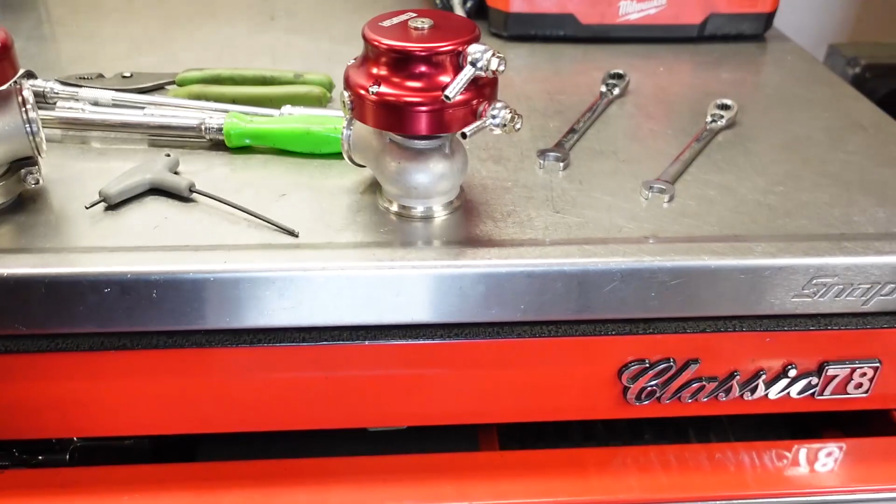Okay, so I've been thinking about my problem for the last week or so, and I came to the conclusion of what I'm gonna do, and I'm about to show you that. Okay, as you saw, I had those two boxes with these little twin wastegates here. They're just eBay 38mm wastegates, nothing crazy, weren't super expensive, but I'm hoping that by adding one on each bank, I can dump a ton of back pressure.

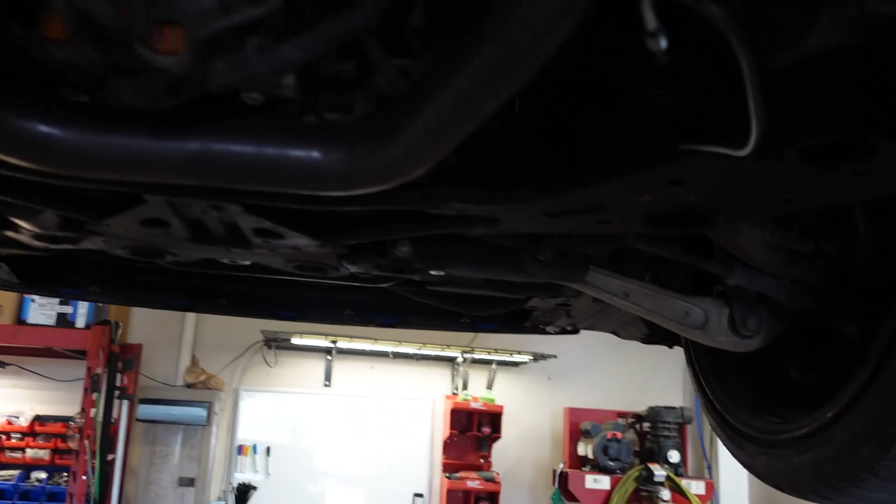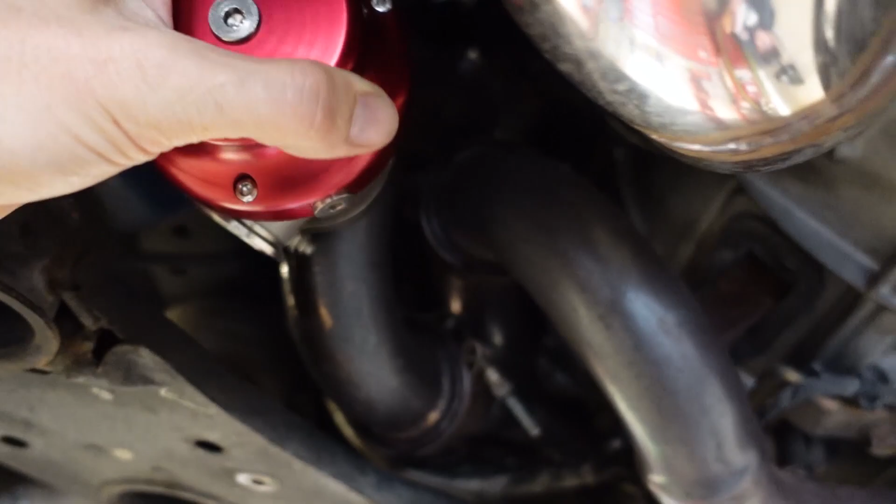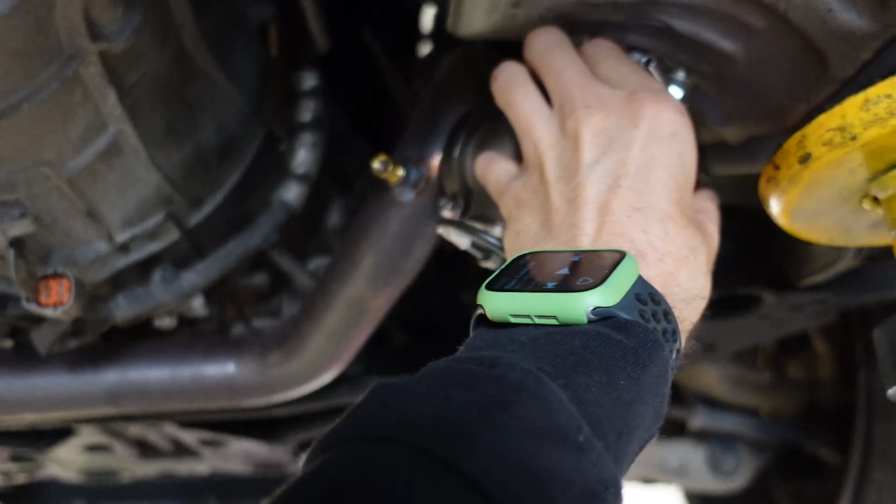So it'll kind of look something like this. I'll have to weld this on, but I have the one pipe coming on this side, and then I have this pipe coming out on this side, and these are the ones that are directly from the header. So that's the header flange down. I'll just shoot it down out of the car like that. And then same on this side. Just kind of put it there, shooting straight down. I have just enough room to get both of these in there.

And then, I'll basically be dumping back pressure off the header directly and back pressure off that header directly. So we should not have overpressure issues. So I'm gonna go ahead and cut some holes in this with a hole saw and then start welding them on.

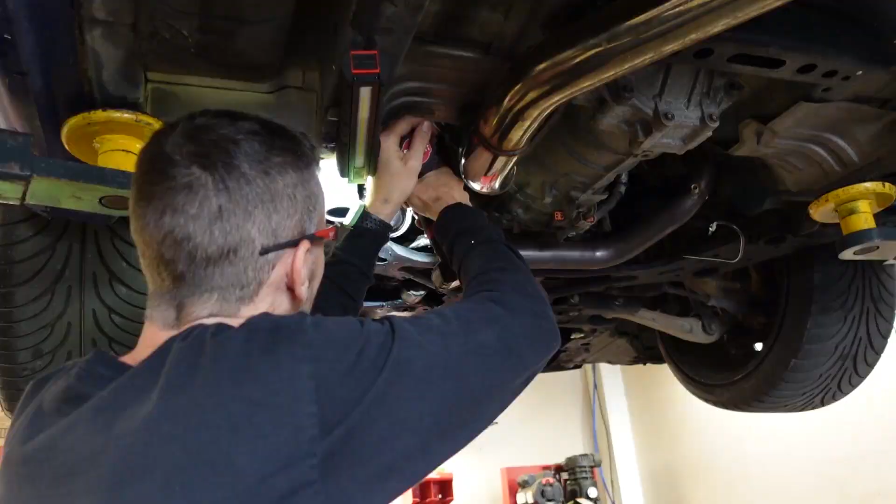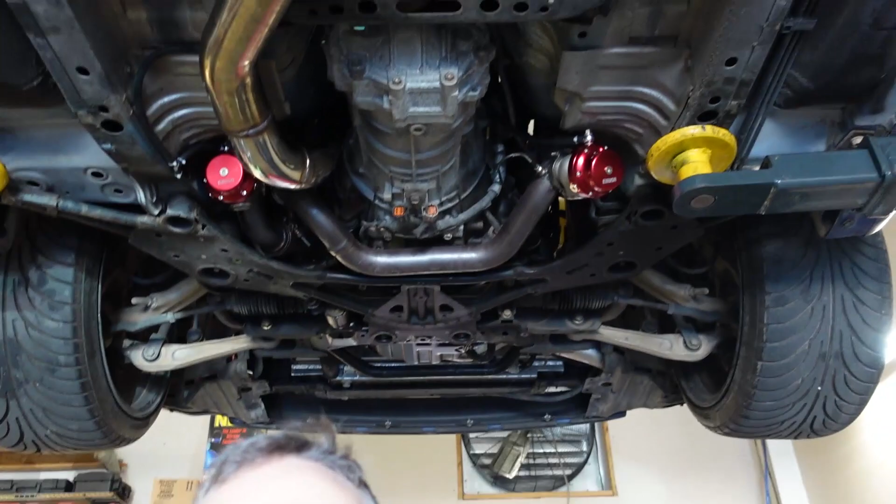Okay, so I finished the welding and I have the wastegates up here. You guys can kind of see it above me. I hope this works. I put the back pressure sensor back in, and I ran all my vacuum lines. Tried to tuck it behind the shield and stuff so that those don't get burned up.

Still got the 3-inch downpipe that I added, which should be nice. So hopefully now we're on a big enough turbo, big enough downpipe, and enough wastegate to get rid of this back pressure. So next thing we need to do is basically just put this thing back on the dyno and see how it does.

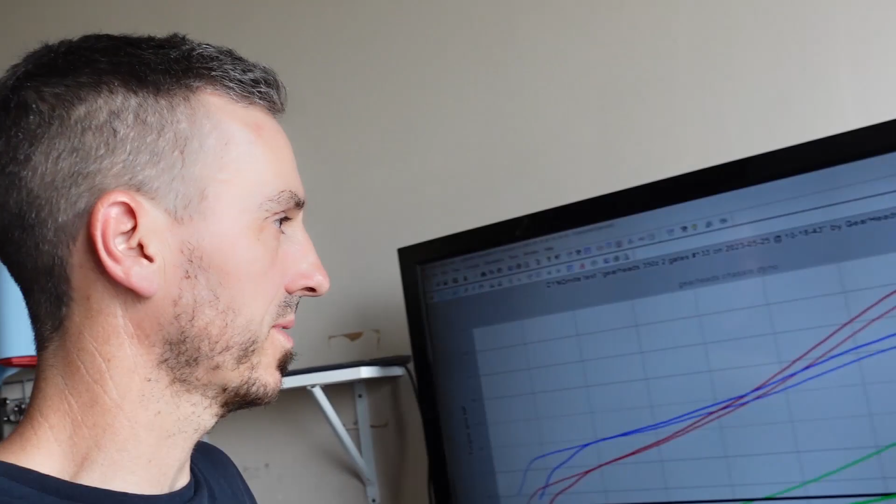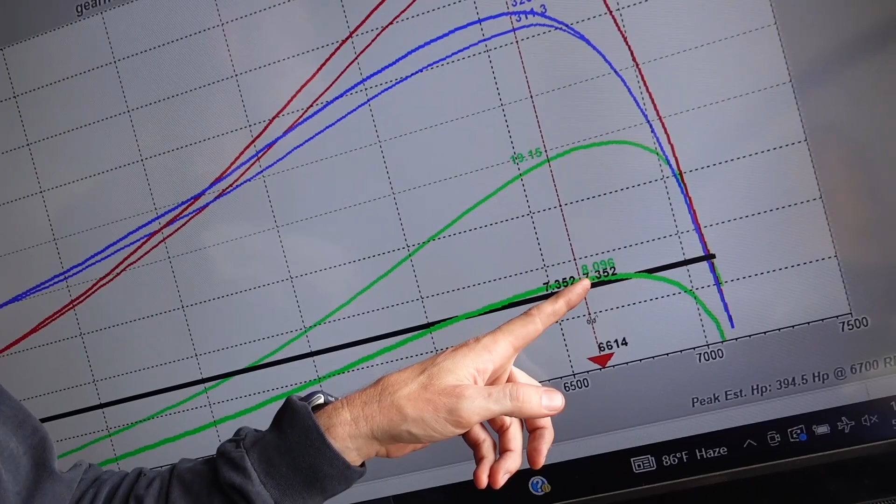Okay, I just got finished making a couple dyno pulls, and obviously the car is getting hot as I'm making each pull, so the horsepower changes slightly, but the good thing is once I got up to 8 or 9 pounds of boost, it was only 2-to-1 on back pressure. So it's definitely better than it was. I was close to 3-to-1 on the smaller turbo with just a single 38 gate.

So I think the best thing I could do is just to go up in boost level and see what happens. The best pull that I made at 9 pounds made 394 horsepower. So that's not too bad. The most I ever made was maybe 406 at 8 pounds on the small turbo. So we got more boost. It's kind of in the same ballpark.

I think this turbo is not really going to shine until I get it to the higher pressure ratios. I just don't know how high I can go on a stock DE motor. So I'm gonna think about it for a minute and then decide how risky I feel with the boost level. But the other thing is, obviously I'm tuning on a stock ECU, so I can't really just adjust the boost. I have to go under the car, pull both wastegates, and change the spring, and that's getting really annoying.

And right now it seems like it's at 8 pounds of boost, which is kind of the highest that I would want to leave the base pressure. So I'm thinking I might have to figure out how to put a boost controller in this before I can go up much more in boost. So that might be my next task, is to figure out a boost controller.

Oh yeah, wait. Maybe it's just time to switch off my stock ECU and put the Haltech in it. Yeah, because the Haltech will have a boost control setup. So, okay. All right, I guess from this point on, I think it's time to figure out how to get the other controller in there and put the Haltech on it. Okay, let's go do that.

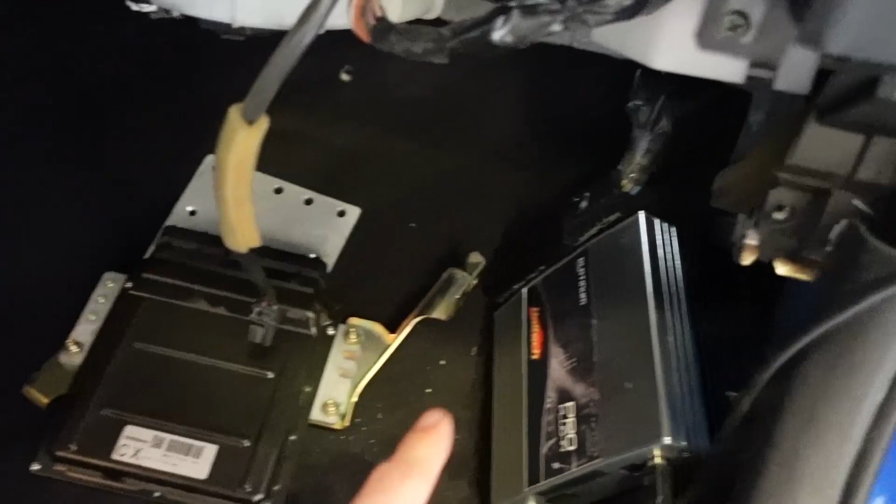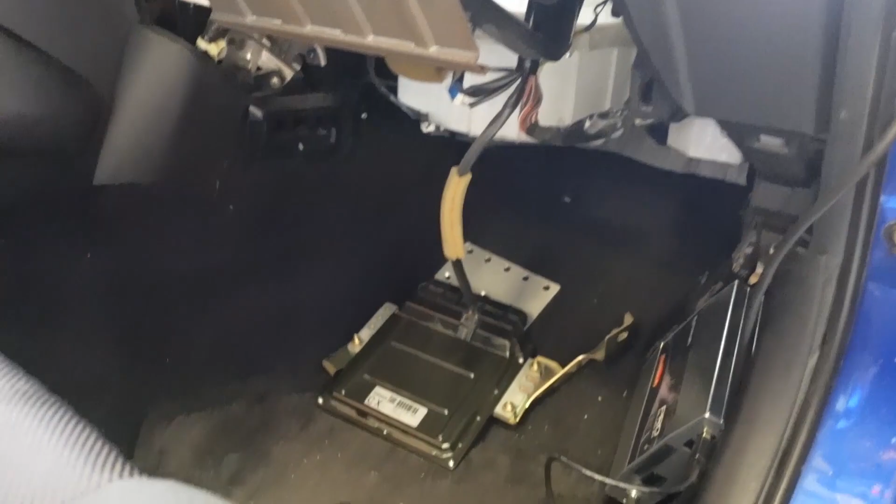As you can see, I have the stock ECU down here, and I've got the Haltech plugged in, and the car does fire up and run on the base map right now, and I need to install a few more gadgets to make things work a little bit better. I've got a pressure sensor and a wideband.

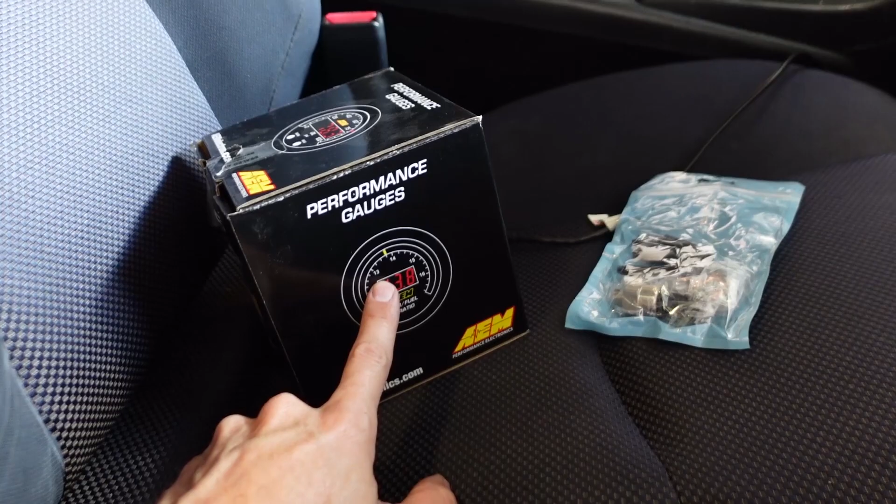If I had more time, I would probably just buy the wideband from Haltech that communicates over CAN, because the communication's so much faster and more reliable through the network that you can do a little bit more with it. But this will still be pretty darn quick. If you get the new AEM X series, it has the sensor ground, so there's no offset voltage, so essentially it'll be accurate at all conditions, so this will be a good second best option, I suppose.

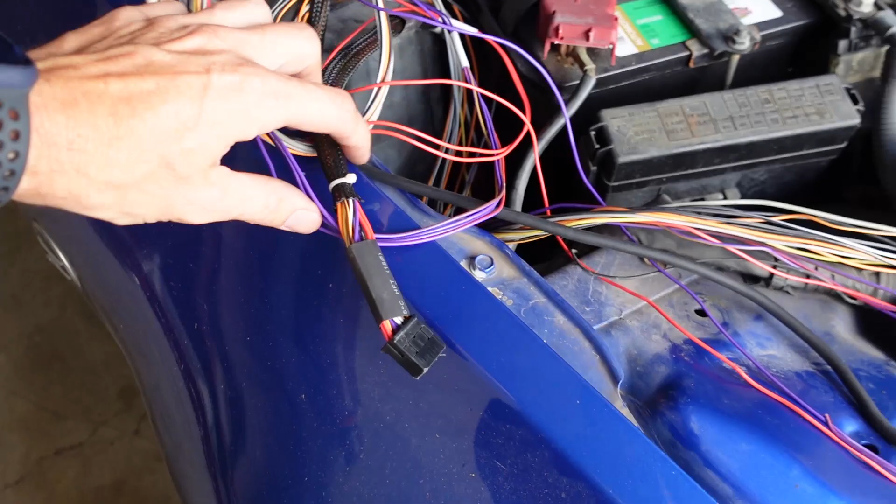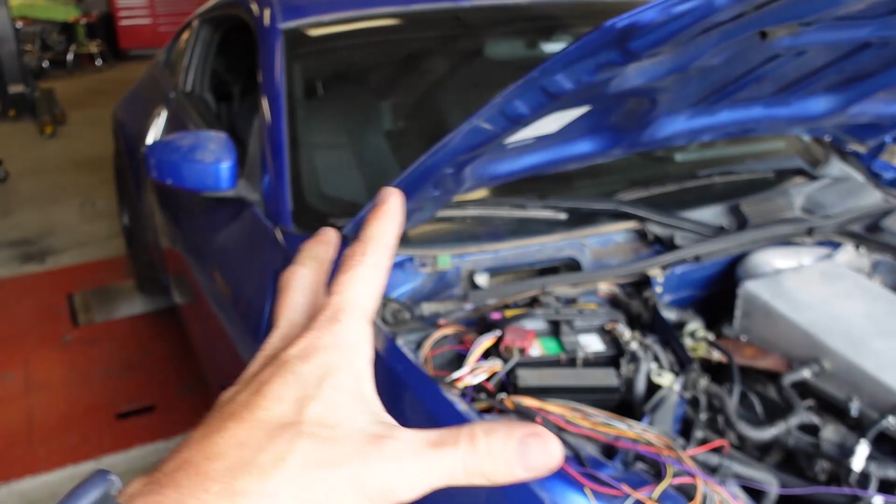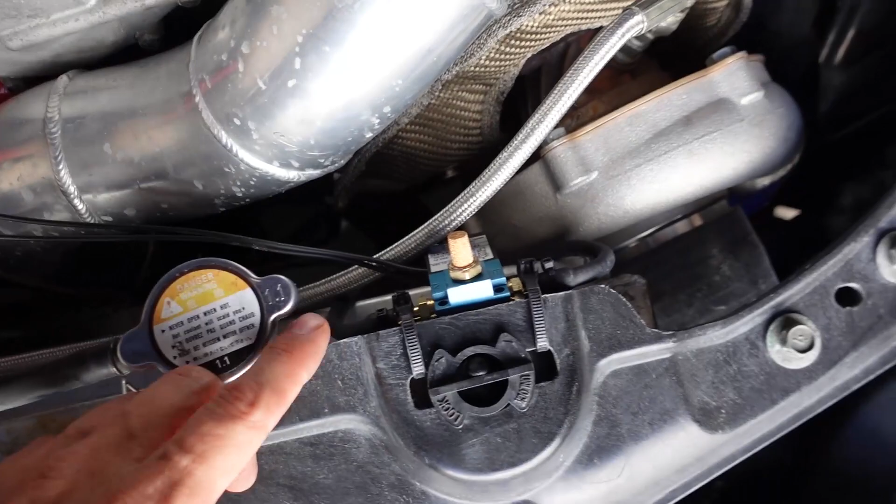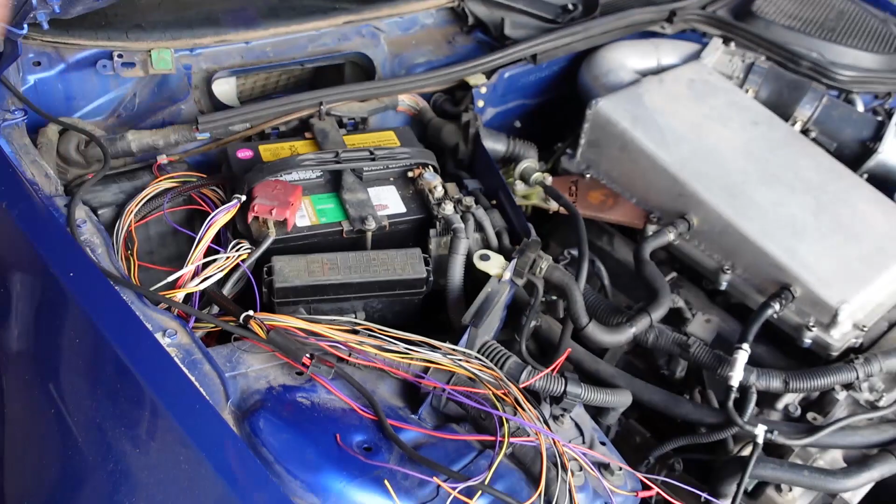But this gives us the ability to run like a boost controller, which I went ahead and plumbed the boost controller in and ran the wiring over, and I was trying to figure out which wires it goes to, so we got these all sorted out. So basically I'm going to wire this up, wire the wideband into it so I can get all the stuff in the data log all at one time, and then I'll get on to strapping her down and making some

more dyno pulls. So obviously last time, a few weeks ago, we were stuck at about like 8 pounds of boost, and I'm hoping, I'll test it at different levels, but I'm hoping to get like 14 or 15 pounds at least. So I got to do a little bit of wiring, and then let's just see what it makes at the higher boost level. I can't wait to see.

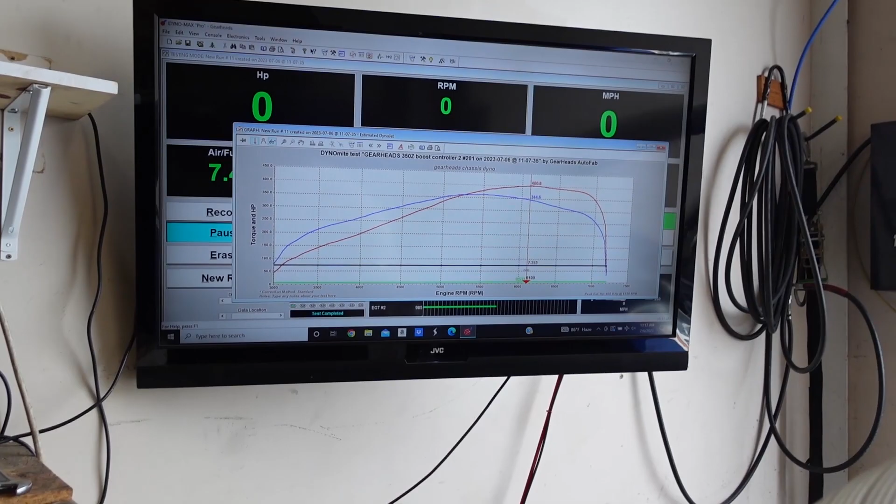So I don't know if you can see, I'll try to show you the screen. Basically, it's really hard to see from here, but 400 horsepower, about 355 or something like that torque, and you can see it's starting to broaden out the curve a bit. So hopefully we can turn the boost controller up a little bit more. I think I'm gonna do 25% duty, see what that does, and I'll update you after the next pull.

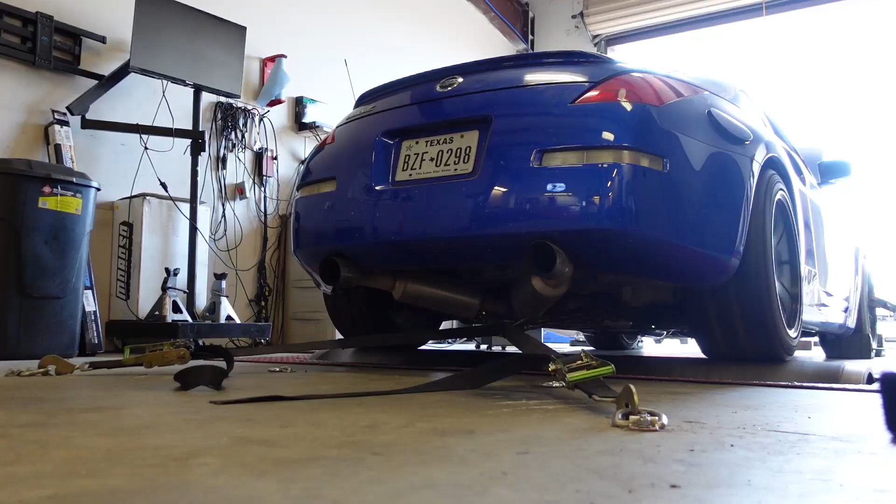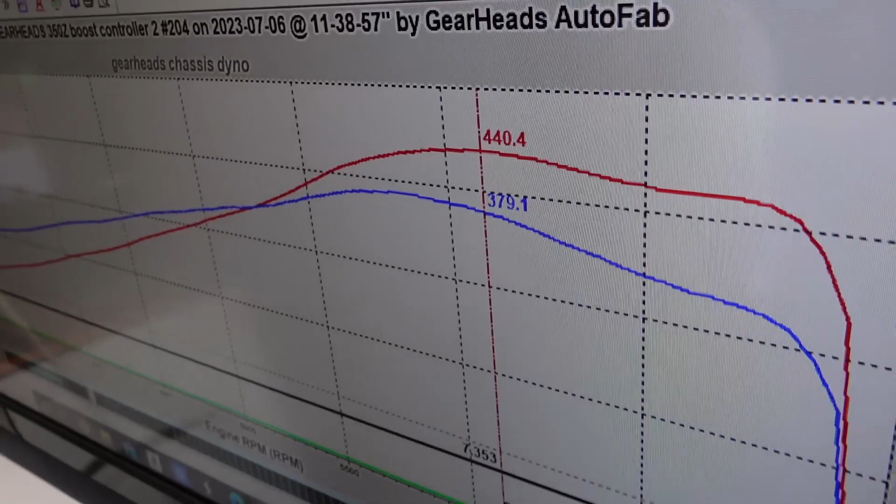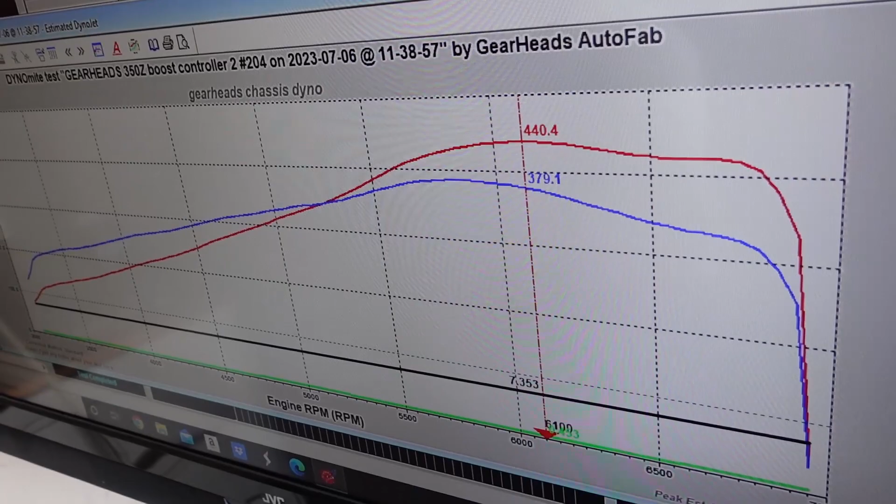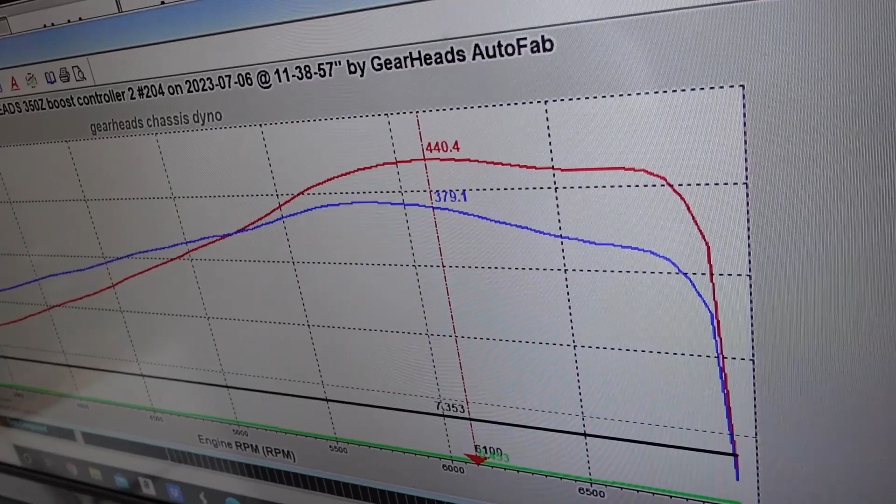Okay, it looks like we made about 440 horsepower, and the torque was maybe like 380, yeah, maybe 385 here. So 385, 440, that was at 13 pounds of boost, with just a little bit more timing in it. And I still think we have a little ways to go, but definitely the horsepower isn't climbing as fast as it was getting to 400 horsepower. It seemed like we could get to 400 horsepower with somewhere between like 7 and 10 pounds of boost, but now with 3 more pounds, we're just kind of fighting for every horsepower.

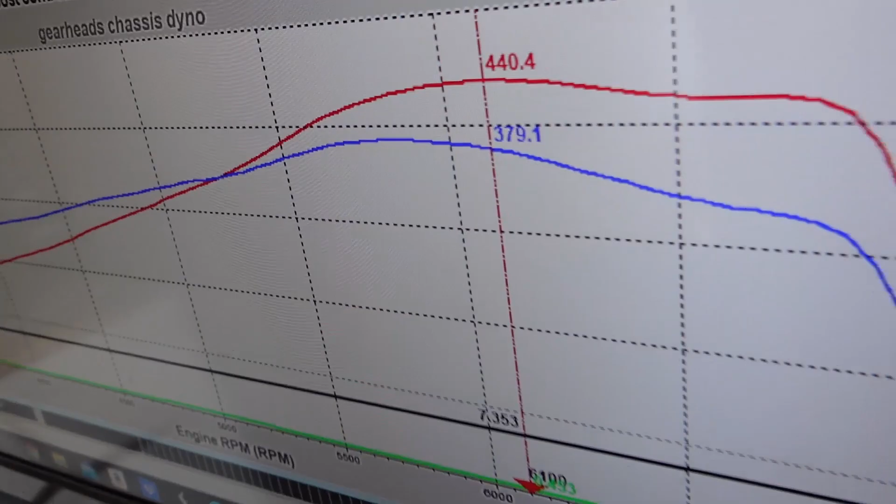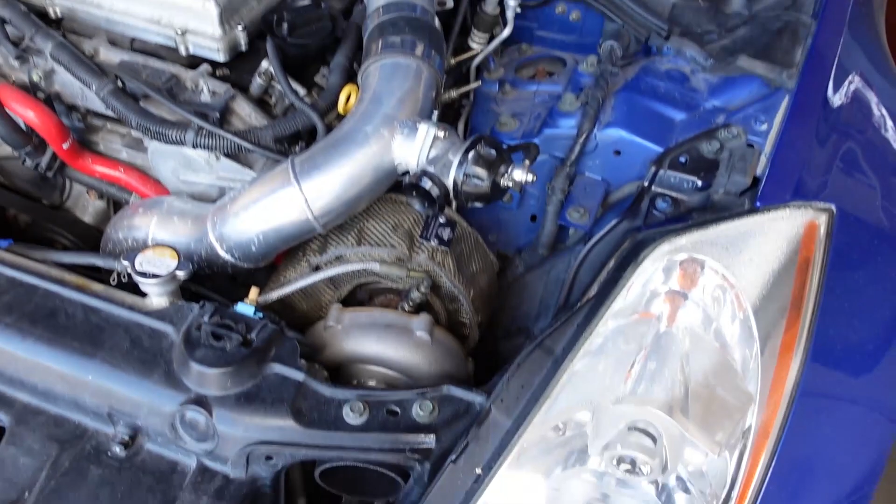So I'm gonna do a little bit more testing and see what it does. But I don't know, I am getting just a little bit nervous, because that's a lot of boost, and that's a very old stock motor. I really don't want to blow it up. Man, I don't know. So after making the last dyno pull, I made 440 horsepower and 380 torque.

I can tell that the turbo that I have is obviously a little bit laggier than I might need. I need to spool a little faster to get to the horsepower I need before we hit the RPM limiter. So on a stock Z, I've got to go to 7,500, which is already kind of higher than the stock rev limiter. It's probably not too big of a deal at 75, but I don't know that I want to go to like 8 or 85 to get the number I need. I'm pretty sure it will blow up for sure. But maybe with a better harmonic balancer, I would go another 500 RPM, but probably not past that.

So I don't know. I'm just really debating what to do from here, because 440 horsepower is pretty good. I'm sure with a little bit more tuning, it'll make right at 450. 450 horsepower at like 13, 14 pounds of boost sounds pretty good to me. It's like, do I risk blowing it up just to see if I can make it to the 500 and beyond number? Anyway, I'm gonna stop the video there for now.